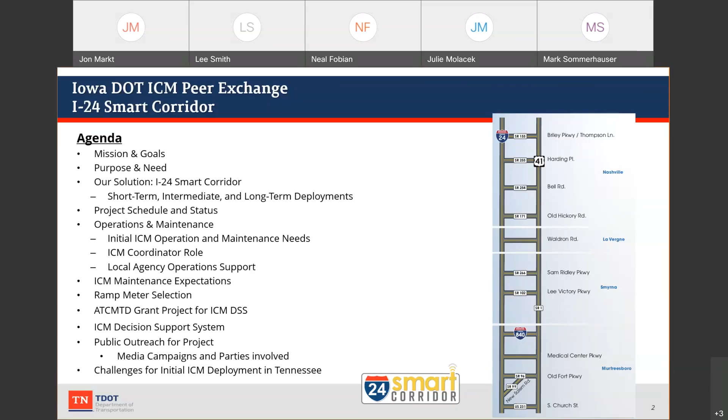I think it's always important to look at your mission and goals, and kind of steer how you're going to operate the technology you deploy. We're in the middle of deploying our ICM in Nashville, Tennessee, so I'll share some elements we have experience with, and some still in planning and deployment phases, but I can share what we're doing to stand up this ICM, and some innovative things at the end about an artificial intelligence supported decision support system. So that's our agenda, and I'll get started here.

TDOT's mission is about a safe and reliable transportation system. That's pretty common among DOTs, but we want to always keep that as our guiding principle. The I-24 Smart Corridor mission is safety and reliability of all travel—we want to bring in all modes, starting with freeway and arterial management as the foundation of the rest. We have 4 goals: improve travel time reliability—not necessarily the duration of your trip—increase mobility of all modes, starting with arterial and freeway management, reduce the concentration of crashes, and develop agency coordination.

There are two really important things about the I-24 Smart Corridor. One is that it's one of the most, or the most, congested corridors in the state of Tennessee, and it also has one of the higher incidences of traffic incidents, crashes, and the severity of crashes.

So that's our challenge for this project. Just looking at purpose and need, I don't know how these numbers compare nationwide, but to us they're high, and we wanted to address this.

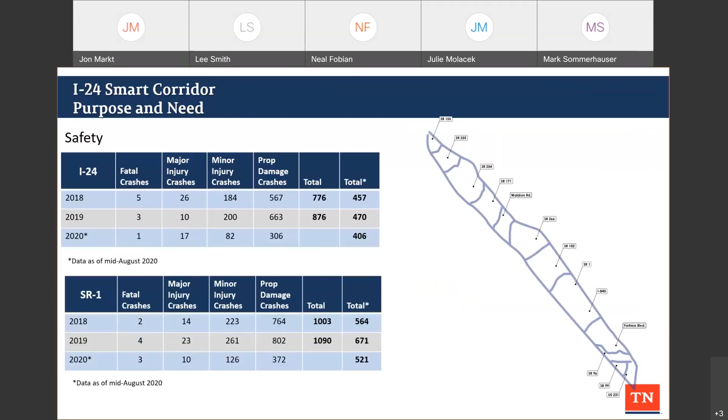This is kind of a picture of where we are. Nashville, Tennessee, running southeast to some of our bedroom communities and suburbs: La Vergne, Smyrna, and Murfreesboro, Tennessee. Those are the four agencies teamed with TDOT: Metro Davidson County Nashville, City of Nashville, and then La Vergne, Smyrna, and Murfreesboro. They're the ones I'll be referring to as we go through here.

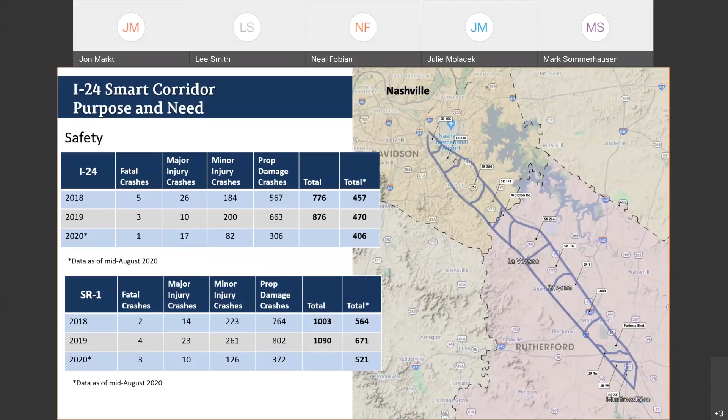So the incidents of crashes, property damage - these are the numbers we're trying to improve upon. Then looking at reliability, the TTI index, those are again trying to drive those down on both the interstate and the arterial.

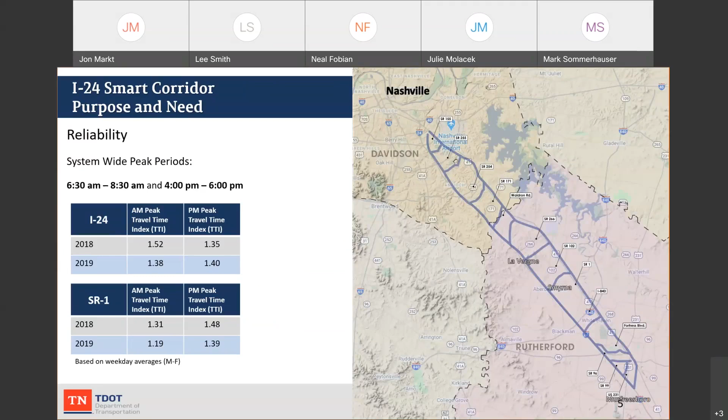One to note also, State Route 1, call it Murfreesboro Road, it's in some sections at capacity, other sections there's maybe some room, but definitely active management will improve that for sure. So our solution to these two problems is a smart corridor, integrated corridor management.

For us that includes just improving situational awareness, the basic of what we do freeway management wise every day, using our cameras, our radar sensors, probe data, DSRC - we have that as an element of this project as well. Then public communication, just sharing the information with the public, and then going into improving our operations.

These are the strategies we're looking to deploy, at least in phases here. I'll talk more about that later. Then improving overall management of the corridor, building the foundation for decision support and building this foundation of interagency coordination. That'll be a big piece of what we'll talk about.

So incident management, that foundational traditional tool, and then traffic management being new to Tennessee as far as using these kind of strategies. Like I said, the first list there will go into a couple different horizons of how we're using these different strategies. And then overall integrated corridor management.

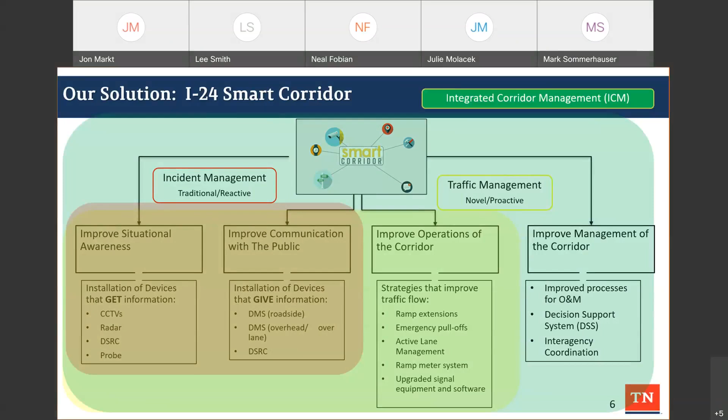So that's kind of the concept. And then we'll get into some of our short-term deployments. This project is actually phased, luckily I think, because we're introducing brand new strategies to Tennessee.

Variable speed limits, active lane management, ramp metering, and active arterial management, a coordination with local agencies. Tennessee does not own or operate signals, so we have to work with our local agencies. They're responsible for operations and maintenance. So the state DOT being involved in traffic signal operations and maintenance is a brand new thing. We're kind of plowing some new ground on a lot of this.

Brad likes to call it the Cambrian explosion - we're taking huge leaps forward in how we manage traffic in Tennessee with this project. So we'll run through these pretty quickly. We have three phases to the project. The first one is kind of a foundational phase.

We're putting all new traffic signal controllers in 83 signals along the corridor. We're putting in additional roadside DMS. We're putting in some simple things like ramp extensions and emergency pull-offs. Those are low-tech solutions, but they can have an effect for sure. So that's the first phase.

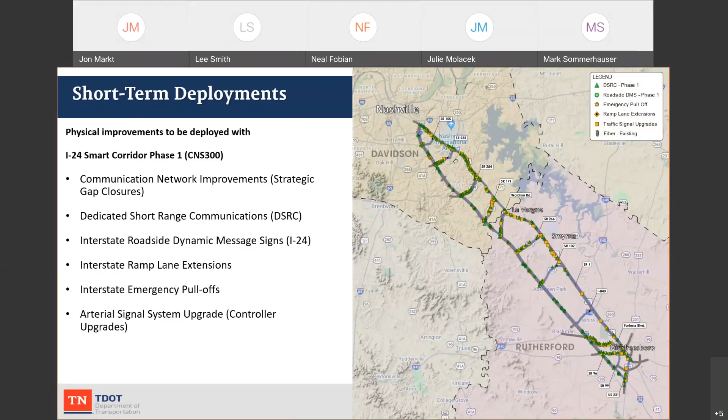This is just a count of the number of these devices on the corridor - DSRC along there. The rest of the devices, I don't need to read that to you.

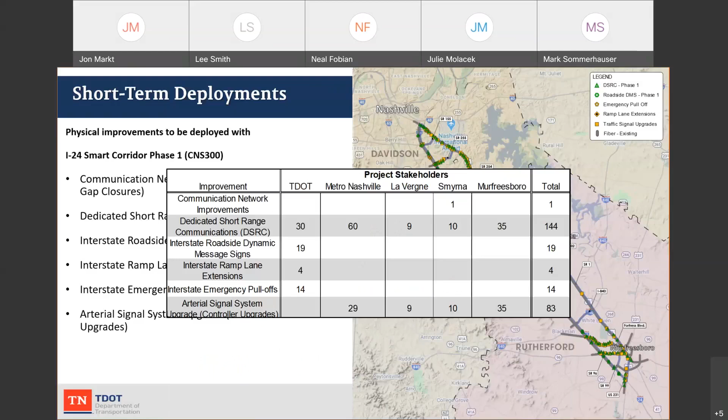So getting into some of the operational improvements. This infrastructure we're going to use to do signal timing optimization, update our TMC procedures, because this affects both the arterial procedures and our freeway procedures obviously. Improve our operational coordination, and then putting in some really good active arterial management kind of tools.

We're using Bluetooth, we have the Econolite product as our traffic signal controller, and that puts Centracs as the platform for that. So we're using ATSPMs, measures of effectiveness, Bluetooth - these things to tell that story, and also to give the traffic engineers along the corridor some really good tools to improve day-to-day operations, as well as when we have to do incident diversion.

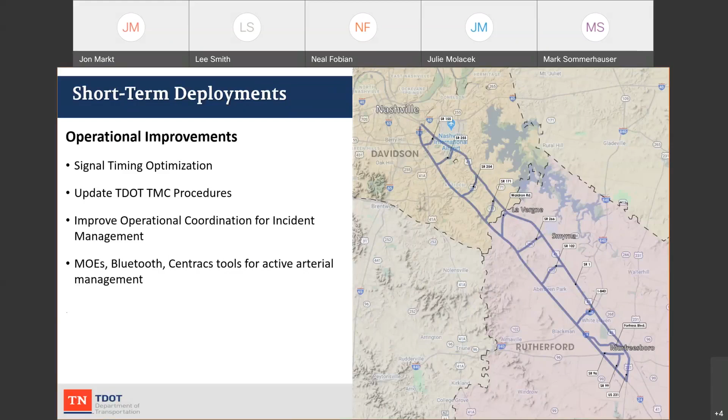So then going into intermediate deployments, just going to run through this pretty quickly. This second phase is the one that's going to be most visible, and we're in the middle of deploying this phase. We have over-the-road lane control gantries - it's a huge difference.

That's what the public will really see to start with. So we're really gearing up and preparing for that phase. And I'll look at the schedule here in a minute.

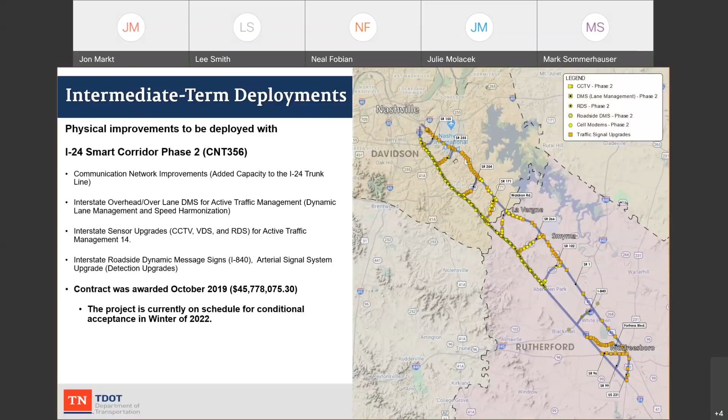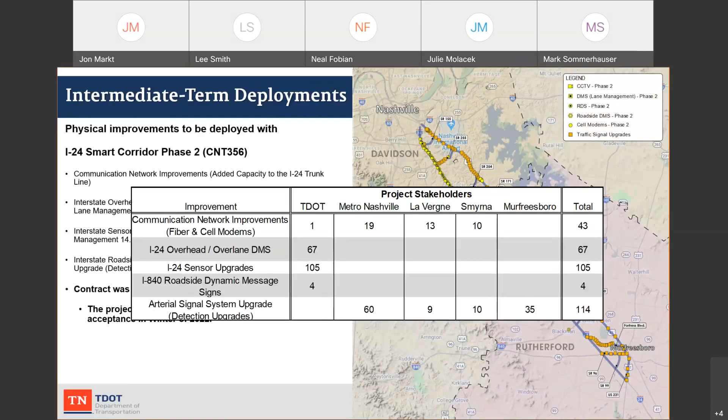So additional dynamic message signs, and we're adding some communication improvements as well. Going through the numbers of the various devices, DMS, we're going to put in stop bar control with video detection using the Miovision product at all the intersections, and additional overlane DMS for active lane management.

Then some operation improvements with that. I mean, this is only 3 bullets, but it's huge: Interstate incident management response plans. There are crashes every day on I-24 that already divert traffic to the parallel arterial, but we're going to try to manage that traffic. And then the flush plans, utilizing the variable speed limits and the active lane management procedures.

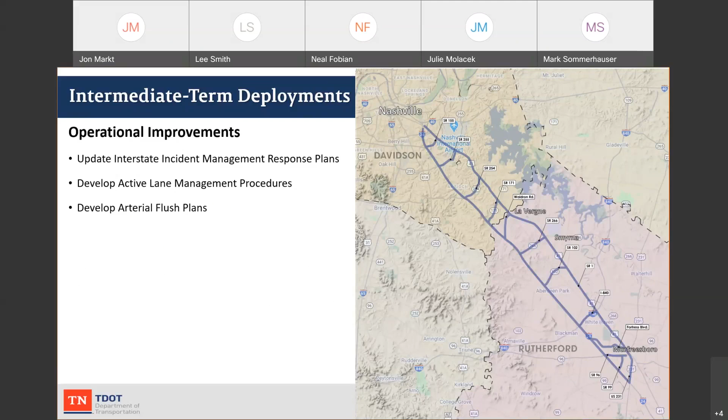And then going into the long-term deployments, this is phase 3. We're going to be deploying ramp metering. We've just completed a study that has selected the algorithm we plan to use there. We're going to put in arterial CCTVs. That's relatively new, there are only a few agencies that have many of those. So we're going to have basically camera coverage along the arterial corridor, and then some operational improvements.

I'll talk a little bit about the decision support system. One piece you might see that's missing here is transit. We will include it in our active arterial management piece. There is a transit signal priority project along the north or west end of the corridor that we'll be incorporating and be able to accommodate. But we really want to see more on the transit TDM type strategies. The honest truth is we just need to get our basics down.

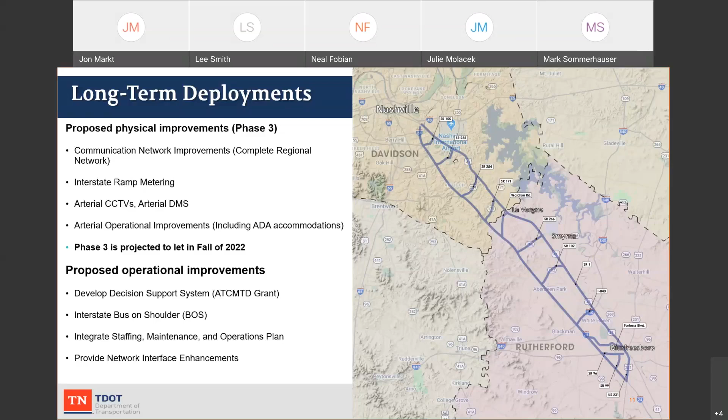We need to crawl, walk, run. So managing the arterial with traffic signal operations and improved O&M, as well as active lane management and variable speed limits, those are things we have to get down. We'll definitely have vision in our ConOps and in all our planning documents to incorporate and add other additional modes. So going through here, here's our overall schedule.

So we started this project, phase 1, back in 2018. We've just at the very end of deploying phase 1 - as often happens, it's been extended a little bit. We're right at the very end, just validating the DSRC as one of the last elements we're doing. Phase 2 construction is ongoing; we're right in there, and that one has been extended as well, as you all can appreciate. Construction contracts often do. So this is kind of where we are on the schedule.

But the more important thing we're really focusing on right now is the O&M schedule. So we are developing all of our standard operating procedures for both the arterial and the freeway, looking at the ITS network configuration, updating all our ConOps documents. We're really focusing on getting all the O&M pieces in place to operate the ICM strategies we're implementing. This is really a focus of our team right now. We have Arcadis as our consultant helping us with that, and several of our staff members are tapped out to really focus on the O&M development.

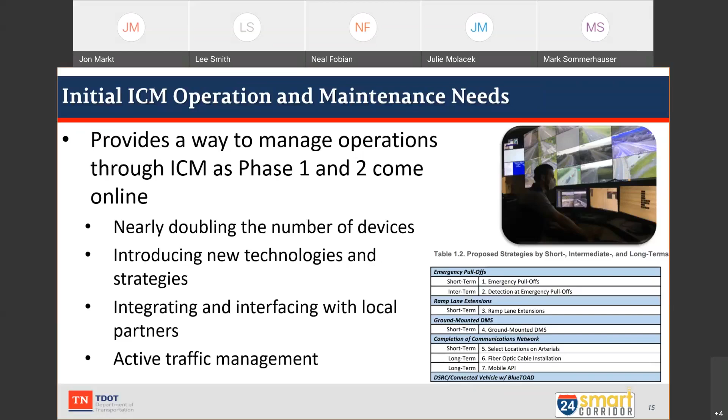So we've developed this concept, and we started looking at the capabilities of the local agencies and the maintenance agreements that they use.

Some states have different models—in Virginia, they own all the traffic signals. Different models are out there, but in Tennessee, where we are right now, we don't own and operate signals. We have to develop some way to bring a system together that can be maintained and operated at a high level.

So when we looked at what the O&M program is for the local agencies, we arrived at: we're not going to fund O&M directly for now. We're going to do it through a consultant contract, a maintenance contract, providing an additional layer of support.

In addition, our TMC operation is very strong and does a very good job, but they don't currently have the skill set for ICM, for active lane management. These things are new to them as well.

So we identified the need for what we're calling an ICM coordinator. That's the role Arcadis has as we work together with them to develop the SOPs and the training needs.

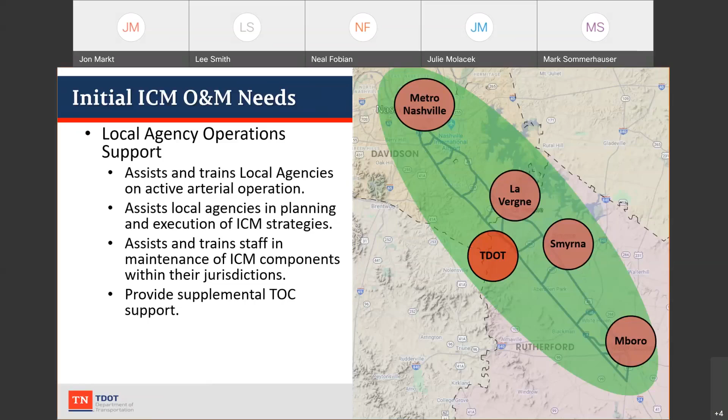Looking at expectations, identifying the key performance indicators, what's the response time needed in order for an ICM to really function. If you're going to divert traffic from the interstate to a parallel arterial, you can't have half the detection down, so you have to evaluate that. What is that line, what is that metric we need to be looking at? Then we can fill that gap. Basically, if the local agency can't repair some detection or whatever in a certain period of time, then we're going to come in there and assist them with that.

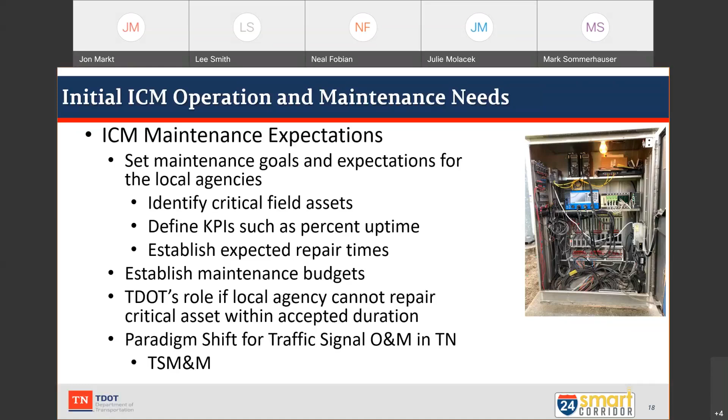This is a paradigm shift for Tennessee. Ironically, we're actually also working on, in a whole other program, providing some assistance to our smaller rural agencies. That's another piece - the acronym TSM&M, Traffic Signal Modernization and Maintenance. That's a new thing we've been doing, kind of addressing the need in a different way, offering assistance to local agencies of less than 2,500 people population. So it speaks to that paradigm shift for Tennessee.

Now we've developed, in phase 3, as that starts up, we've done a study of the ramp meter algorithms that are out there. Our consultant for the phase 3 design has done a great job. They've looked at multiple different algorithms. The one we landed on was the helper algorithm that's used in Denver, Colorado. It's more traffic responsive with central control. Meters are polled every 20 seconds to collect detector and metering data. So we feel like that's a good middle ground, and a good system for us as far as the needs.

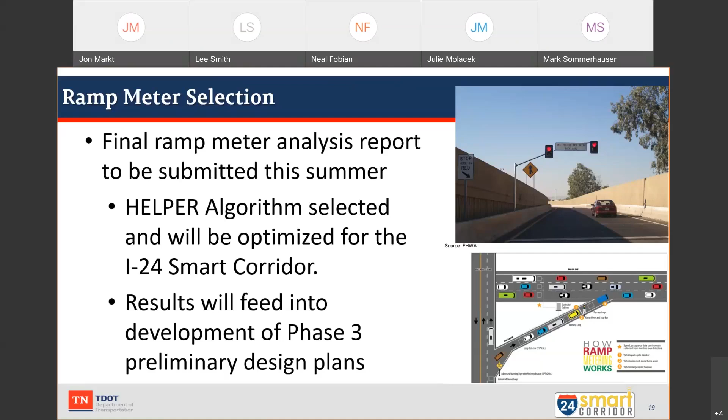And then the innovation that we were lucky enough to be selected for an ATCMTD grant last year. So this is a piece of the project that we have in our ConOps to have vision for, but we don't have that - we didn't have it funded and planned yet, but we got this grant. Now we can move forward with that.

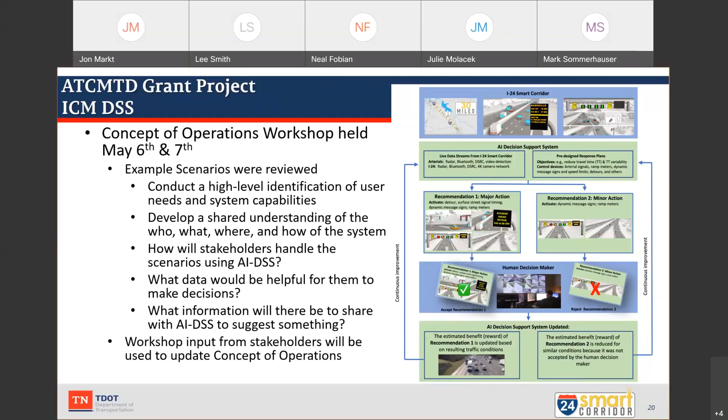So it's created a great opportunity to take the decision support system model that was deployed in San Diego and Dallas - those are based on microsimulation. Our vision is to develop a decision support system that's based on AI, where the model learns through some microsim to learn the basics, and then through operator input to learn what response plans worked and which ones didn't, and this sort of thing. So really excited about this end of the project.

Kind of just the way we envision the ICM or the DSS to work for us - these multiple inputs, weather, 511, all of the stakeholders really have an input into a data bus and the model in order to provide a response plan to the TMC operator that has this intelligence behind it.

The first thing we had to do in this grant project is to define DSS, because different folks have different definitions of that. Our active ITS SmartWay CS platform that SwRI developed - they would call that part of that DSS because it presents a response plan to the operator with this many DMS that it will be part of that response plan, this message going to 511, and that's a form of DSS. We're talking about obviously a much higher level that's going to be supported by AI.

And in an intermediate step, and really the important step for us, is developing the rules-based active lane management and VSL. So those have to stand on their own, and then you bring in as kind of an outer shell this AI supported DSS that's going to just make all those operate that much better.

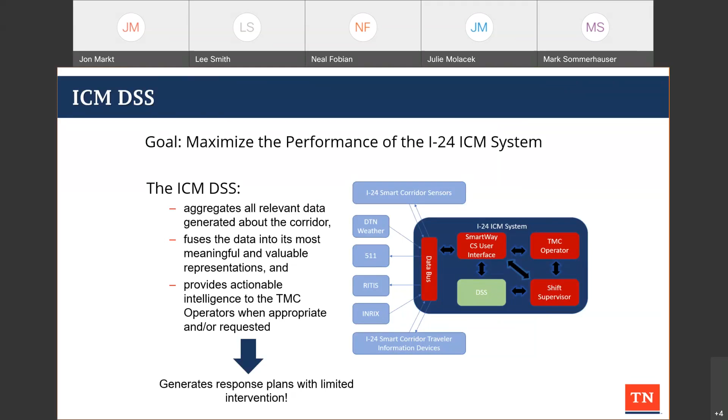Because of the grant, and because it's good practice, we're doing an evaluation process to look at how this tool is going to function. So running parallel to the active lane management and the VSL tools being available, this grant was awarded. So we're kind of running in parallel, which is good, but also the definition of terms between the two projects, making sure the roles and responsibilities are clear between the two teams.

So just kind of wrapping up here.

This really should be the first slide because outreach to the public is huge for this. But we have a lot to do before we're ready to even talk to the public. We've been updating them as we go along. We have a really good project video on our website, but this is a whole other level that we're going to.

We're working closely with our Community Relations Division, CRD, on when we have milestones to interact with the public. We're considering all kinds of things and would love to hear input on this.

We're going to the Lions Club, and we're modifying our driver's manual to educate the public about what the X's and arrows actually mean. We're also considering our HOV lane out there now, which we can dynamically control - that's a whole other topic.

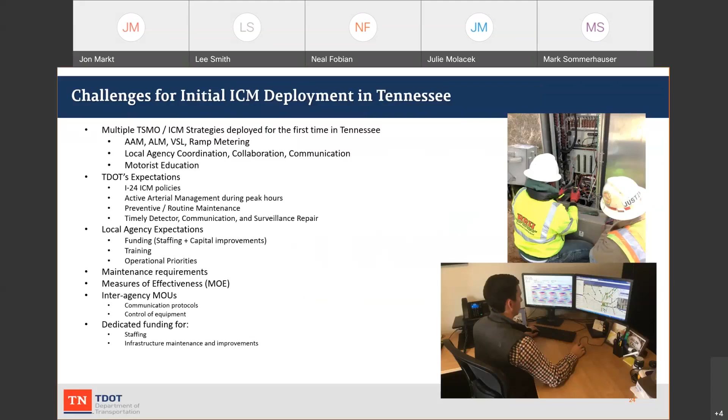This is the kind of project that keeps you up at night until we get everything just like we like it. So some next steps - the two biggest things for our O&M program team are developing the operations for active lane management and the variable speed limits, and continuing our local agency or interagency coordination.

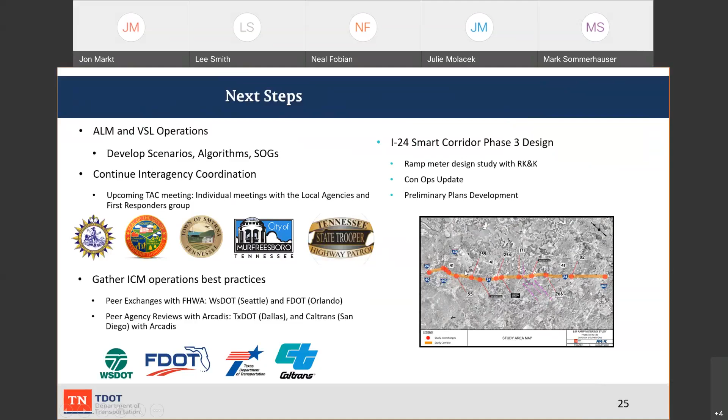That speaks to not just the local agency signal operations, but also law enforcement, our TIM team. We're continuing to gather information from other states, and getting into phase 3. We just finished the ramp metering study, and we're digging into the ConOps update and preliminary plan development. So that's it for me. I think I'm okay on time.

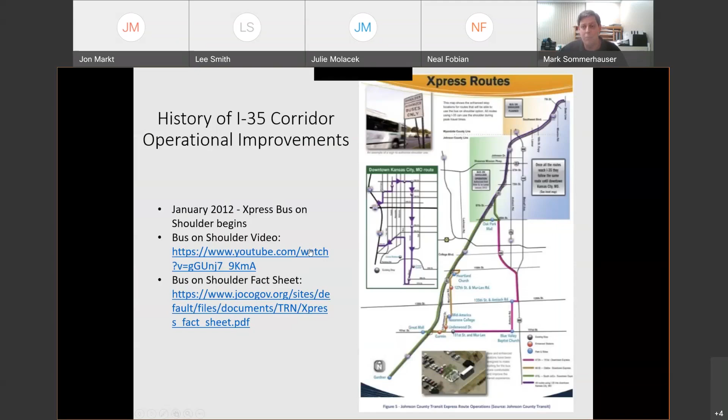So this was really one of the first things they invested in on that I-35 corridor - making sure you have wide outside shoulders and reliable transit, which at least allows some options for commuters going north into downtown in the AM peak and back south in the PM peak.

Building off of that, there was a 5-county regional study in 2013 with recommendations that weren't all about capacity. This large KDOT study talked about capacity issues throughout the 5-county region, and also started grabbing things from the toolbox - operational things we can do to help with congestion issues without having to spend $50 million on a capacity job that really only shifts a bottleneck a few miles or relieves a tiny bit of congestion.

Funneling off of this 5-county study, they had an I-35 specific study that spun off in June of 2013, which they coined I-35 Moving Forward. That was specific to the Johnson-Wyandotte County area I showed in the earlier ICM map - the AM peak into downtown Kansas City toward the Missouri state line, and the evening peak back south. It not only talked about capacity strategies but system management strategies you can grab from the toolbox.

Expand the use of ramp metering to the I-35 corridor. Back in 2008 and 2009, we'd done our first pilot study on the I-435 corridor with 15 ramp meter locations. We did a second one on a problematic ramp - just 2 ramps at 1 interchange that had a safety issue. This was really our 3rd deployment along this I-35 corridor, recommending that we'd learned a lot from those earlier late-2000s ramp meter deployments and needed to look at how that fits in this corridor.

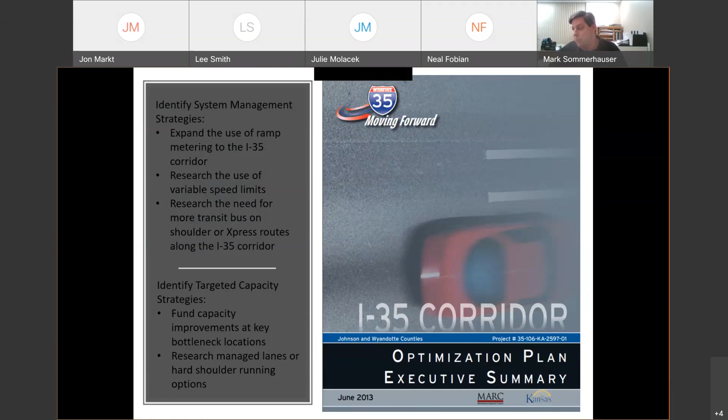But when we looked at the results from these recommendations, we found it was missing some things. There were operational things, especially on the low-cost side, that weren't really covered in depth. When we started hearing about integrated corridor management, we wanted to get on board with that and take these documents and run this concept of operations to see what we were missing and what we could do, especially on the lower cost and more immediate side, since we don't have a $50-60 million ICM project. What can we do that's that low-hanging fruit?

So while we were getting ready to do the integrated corridor management project, one thing that came out was an immediate ramp metering project on I-35, around 2017. That integrated corridor management study was actually getting wrapped up as we were launching the ramp meters in the spring of 2017.

So these earlier studies were from 2013. As we move into spring 2017, we're deploying some ramp meters on I-35 in this corridor. The bus on shoulder has already been in place since 2012, and we're wrapping up the integrated corridor management concept of operations. That's where we're at as we get to the beginning of 2017.

For the I-35 ramp meters, we looked at a lot of the interchanges at key congestion points. We have very good detector data, travel time index, planning time index, and reliability numbers. We could see the need, not just from the detector data but from video data, watching cameras and seeing driver behavior with some of these merging movements. It doesn't take much to say that's not very safe or conducive to a high level of safety, and we should be looking to do something about it.

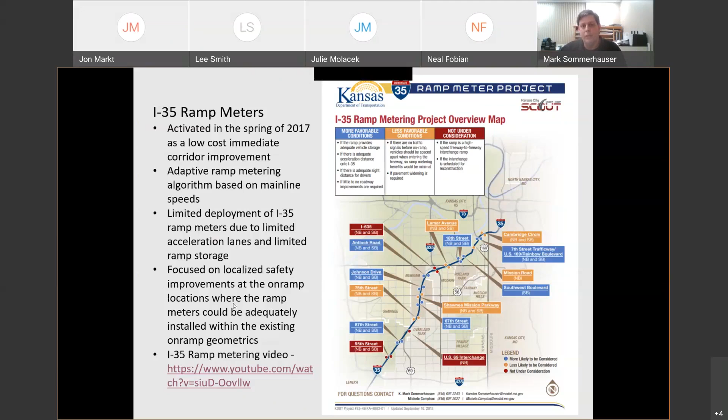So that takes us back to 2017, early 2017. And that brings us now to the actual integrated corridor management project. We got a little funding — honestly, this was $105,000 for a consultant to help us look at what toolbox things we've already done and what integrated corridor management things we could maybe do better.

Honestly, I used to cringe at the capability and maturity model assessments a little bit, but after going through so many of these, especially an integrated corridor management one, I will state it is extremely beneficial. It's not supposed to be 100% accurate, and when you get a large number of stakeholders in a room, it doesn't have to be precise — not everybody has to agree. But what it does is bring a lot of discussion.

Especially about what things are really siloed and very low functioning, and what things may be highly functioning — learning from the successes, the things that are maybe multimodal integrated, optimized, or partially integrated. How did you get to the point where some of those things were operating at such a high level?

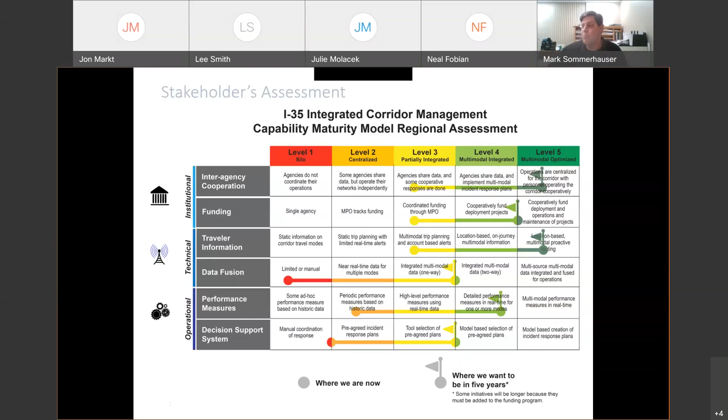So we did take time with stakeholders and go through the full capability maturity model. We were able to get a lot of good discussion and really start to identify some of the gaps. We pulled bus on shoulder, we pulled ramp metering, we've been doing freeway management, we had Operation Greenlight, which I'll get into more detail, and we had the capability to do cross-jurisdictional signal timing. There's a lot of good things going on, but there were definitely things that could take some work and needed some work. So starting off with the capability maturity model was a great way to start.

That led to when we really started looking at the corridor — we stopped for a minute with a consultant and talked about taking it down to a personal level. We have good census information, occupancy, OD information, where people are traveling to and from. So we actually made a list of like 12 fake people and said we have the capability to look at what they do on a day-to-day basis, what their travel commute is really like, and what transit options they have.

What cycling options do they have? What time of day are people going? And what does it mean if they want to go from where they live to where they work, or maybe to a doctor's appointment? We actually made some fake trips.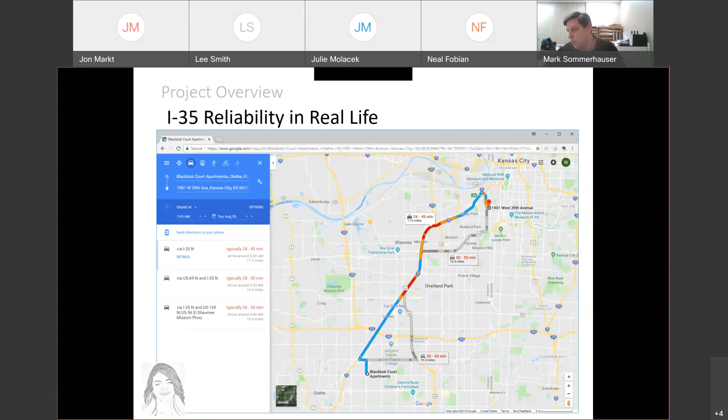Again, this is right here on the map. You can see in this edition what someone was taking for travel time. This isn't doing anything fancy other than using Google Maps and some of the tools out there. But what are the routes, and if there's an incident, where is it showing they have an option to travel around? We took several of those and ran through fake trips.

If you look at our final report, this person in the bottom left we nicknamed Sarah, just a fake name, and this was the one we focused on. But we really wanted to see, what is it really like if someone wanted to take one of those express bus routes?

Is it realistic to triple the number of buses doing that, and will people really do that? Or is it so limited in its options that whatever bus-on-shoulder is providing right now is probably all it's going to do? What are the options someone has to detour on a signal route? This I-35 corridor, as you've noticed, is kind of a diagonal route, not a straight north-south route, so there isn't one parallel highway where you can do a lot of specific detouring. There may be 4 or 5 different grid routes available.

We really wanted to talk about, back in 2017, what things like Waze and Google Traffic were doing. Are we going to really invest in a lot of arterial message boards when we know private industry and some of the travel routing apps actually diversify traffic on their own, and people are more liable to follow that than a trailblazed route?

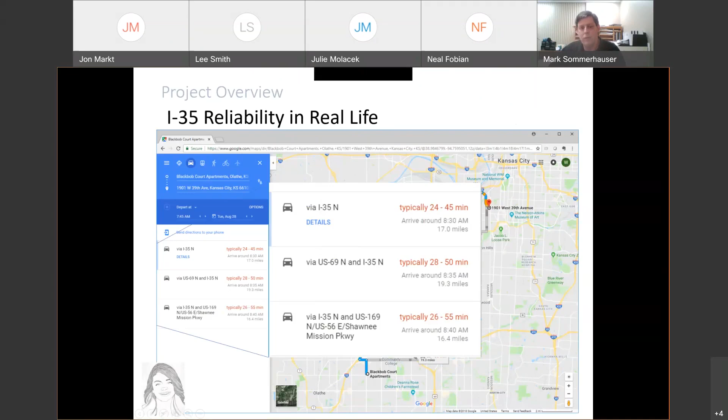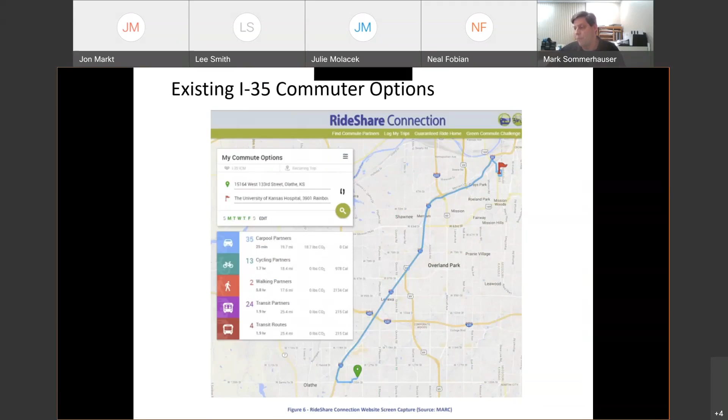One of the big things is the Mid-America Regional Council, the MPO, does and has for years done rideshare. They have a lot of apps and things available to commuters so you can find carpool partners, cycling partners, walking partners, transit partners, and map out those routes. So we cross-referenced those optional routes with what was available for any commuter in that area.

Then we started looking at Operation Greenlight, again led by the MPO. They do the cross-jurisdictional signal timing. If you look at this, you see some of the major routes and how I-35 is kind of the diagonal route into downtown Kansas City on the Missouri side.

So there are options, but they were going to be tough. If we were trying to route people for a major incident, it's not just get on this north-south route and ride it for 10 miles — you might have to jog and do some lefts and rights. When you talk about trying to signal time and optimize detour corridors that aren't in a straight linear motion, that may require multiple lefts or rights, it can get very tricky. So we didn't want to give up on it, but it wasn't going to be a major focus of what we were doing.

We wanted to make sure we had great communication with the Operation Greenlight signal timing people, that they had good funding not only at their level but at each of the municipalities' level. But it wasn't going to be the catch-all. We needed multiple integrated corridor management solutions if we were really going to bleed off traffic during major incidents. So again, just another tool in the toolbox and a great partner to have, but it only has a limited amount of stuff that they can actively do.

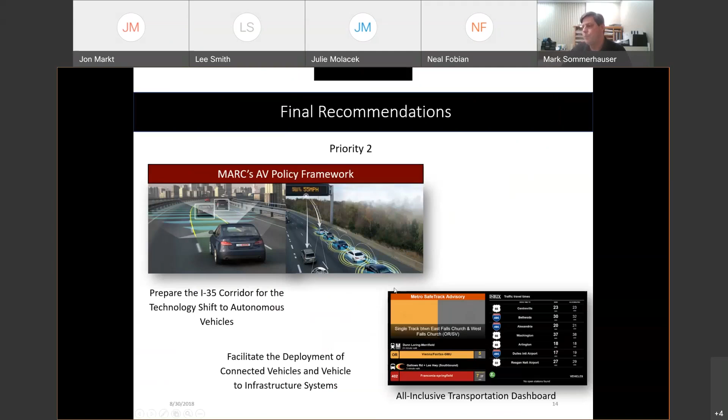Priority number 3 had 2 items. One, to expand the use of DMS on arterials. And I would say since 2017, that's gone down even more. I think we've identified that with Waze and some third-party apps and trailblazing and multiple paths, there might be a couple of key locations that get DMS on arterials, but there probably won't be a big investment. Part of that is because we don't have a good straight north-south parallel route. There's so many different ones, but it's also what are the third-party driving apps doing, and can they do a better job than what a DMS could do anyway? In all honesty, are drivers more liable to follow that than what you post on a message board or a trailblazer sign?

The implementing of dynamic lanes, managed lanes on I-35, that has been a little bit long-term problematic in the fact that the geography on this section of I-35 heading to downtown is so tough. We have an active freight line, railroad line, right to the west. There's a major creek tributary just to the east, and we've already installed maybe 8 miles of large retaining walls. So even if you wanted to build it, there's not a lot of room to add the concrete that you would need for a managed lane.

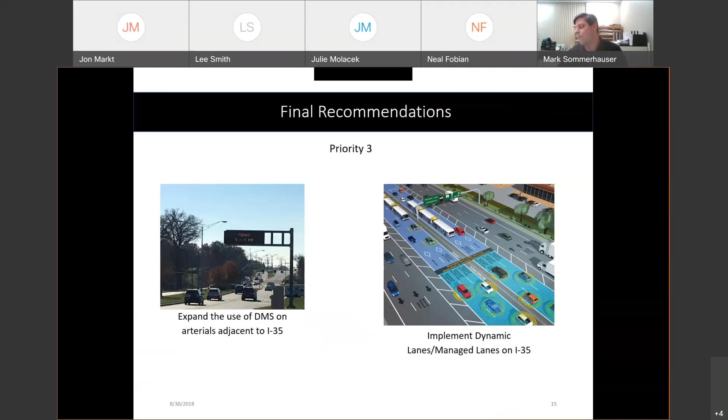So kind of focusing back on this corridor, again, we were looking for reliable travel time along that I-35 corridor. We don't have a big funding package to do a full integrated corridor management thing, but we do invest in the Scout Freeway Traffic Management Center every year. We invest in the Operation Greenlight Corridor. We've already done 6 ramp meters.

We have elevated incident management to an MPO-led committee that is looking at, again, things I mentioned, like the Waze alerts from AVL when there's people out there, looking at what are some of the major detour routes and high incident locations. We've gone back and looked at some of the bottleneck freeway things that would take a capacity construction, concrete and asphalt project, and we've looked at those.

First, I mentioned targeted capacity and bottleneck improvements that impact corridor operations. Those shouldn't be exclusive. Capacity and operations should be funded together if you want to get the most benefit.

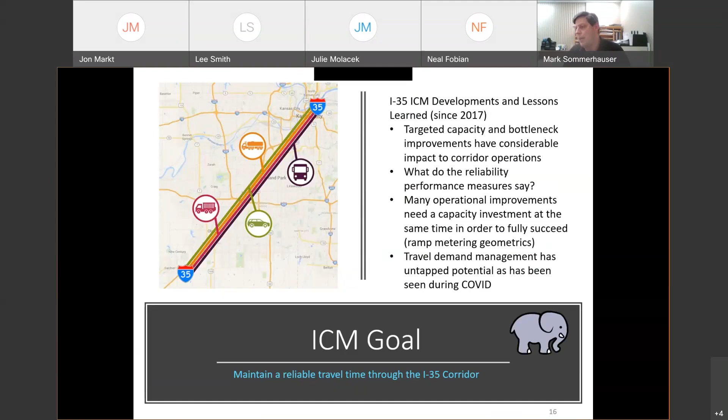And then I mentioned before that the travel demand management, especially what we learned at COVID, is there any way that we can do something with those major employers to make that more long-term? Again, this isn't comprehensive to everything, but those are some of the biggest ones. So again, I appreciate the time. This was a low cost kind of analysis we did to kind of reset where we've come from.

With that, I'll open it up to questions if there's any time left.

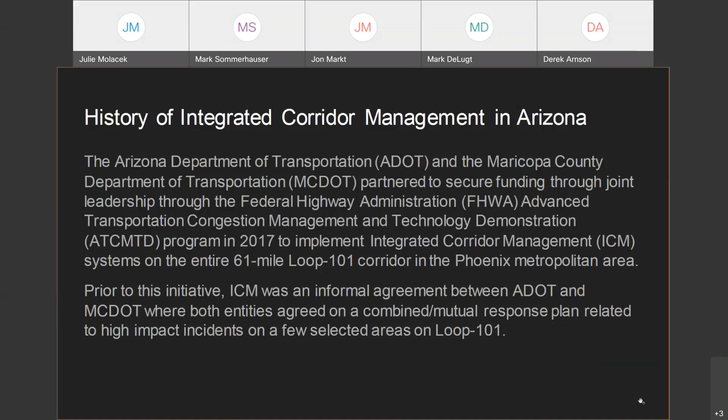So the goal of the Loop 101 mobility plan is to leverage state, county, municipal, and private investments to facilitate improved real-time freeway arterial coordination when incidents impact Loop 101 and divert traffic onto local streets.

I think both previous presenters said the real impact is, sure, we can manage events on the highway, whatever they might be, but ultimately that traffic has to go somewhere. That's where Kimley Horn was so instrumental in trying to ensure there was participation and buy-in from the various other government entities, municipal and some outliers, saying this really is something you need to be involved in.

So the ICM program will increase agency awareness of incidents, develop enhanced decision support system capabilities for advanced TSMO strategy implementation, promote across-agency information sharing, and provide advanced warning and alerts to travelers on the corridor to promote trip decision-making and awareness.

And that's that last bit right there. I think it's very easy, as we view our own responsibilities, to become enamored with our own direct responsibilities and responses. For myself, with a background in police, and what I've seen here with ADOT, is that operationally we tend to focus on unit response, incident management, documentation, notification.

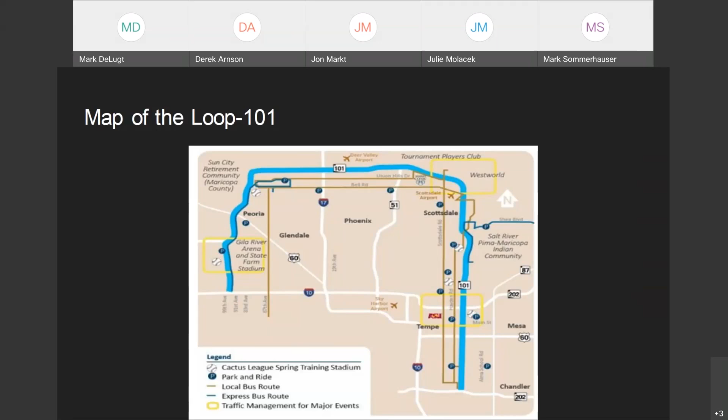All right, next slide, please.

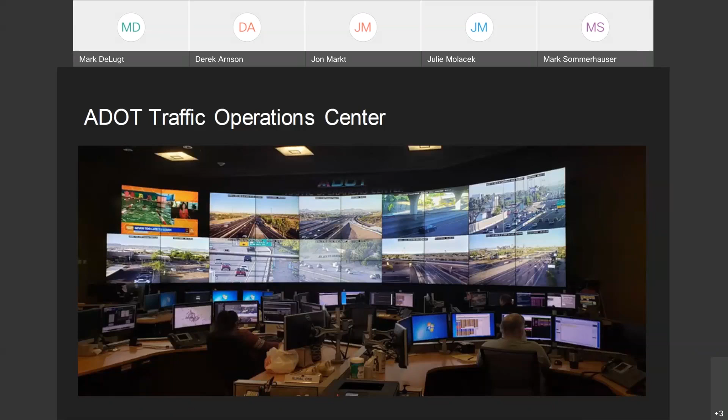To mention the ADOT incident response unit, the IRU: 14 mobile units on the road from 0530 to 2030, Monday through Friday, overlapping, and it's been a great addition to ADOT's resources, for the great support we can give law enforcement, having these guys out there in these trucks providing support not only to motorists in difficult situations, but to the many DPS traffic units out there, a lot of them on motors. Just having them out there, providing law enforcement support, creating a safe situation, getting motorists off the highway, removing impediments, a great leap forward in timeliness for asset management and response to damage. The IRU has been a very good success, with lots of positive feedback internally and definitely from citizens. It's been a success story for ADOT.

All right, next slide, please.

So again, the operational aspect is critical, but it's just one of many factors, including but not limited to wide-ranging and impactful admin and technical aspects and applications, to ensure success and adaptability regardless of the situation or stakeholders involved. Operations is one small part of planning, admin, and technical, but it's where it starts. It has to start somewhere. And for those with eyes on it, working directly with public safety, it's been our experience that it's the best place to start.